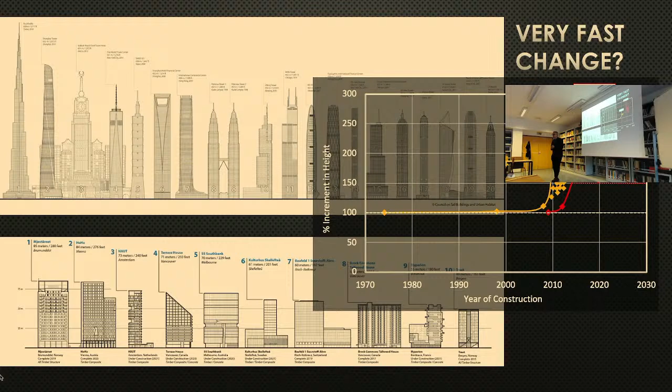But when it changes from being the contents of the building to the structure of the building, what is really the problem?

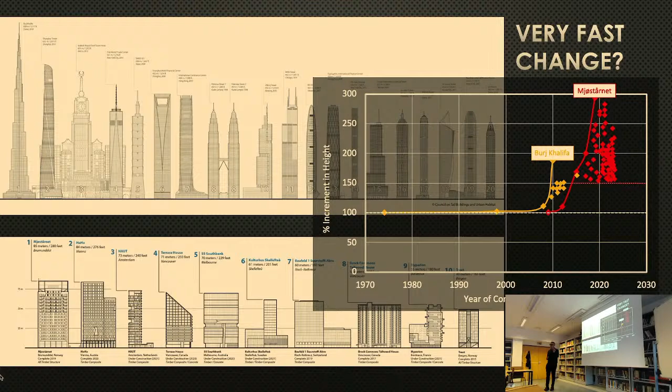Why is it so different to design a structure that is made out of timber, as opposed to designing a building that is filled with timber or cellulosic or char-related contents? The question is not easy to answer because it's not as straightforward. It's a real complicated problem that requires us to go back to what is our definition of a safe structure when it comes to its performance.

When we look at timber, there's been extensive work on structural safety. People have studied robustness, durability, sustainability, but not as much its fire safety. We design buildings, but the question is, are we introducing fire safety appropriately? These are the real questions we need to ask ourselves, and basically, what do we really expect from the performance of a timber structure?

So we have a structure, and a structure has a function, and that function has to deliver something. And that something has to be the same, whether the structure is made out of timber or whether the structure is made out of a non-combustible material. That functionality is what we need to be able to understand. The reality is that all buildings, independent of what material they're made of, have to deliver the same level of safety. We cannot accept to use a structural material that actually performs less than others.

At the end, the level of safety is part of a social agreement, and this is what we expect from all our buildings. You're all sitting here, and I presume you all feel that you are safe, no? Because we have accepted that the way in which this building was designed gave us the right level of safety, and as a result, we walk into these buildings confident that those buildings are actually safe, and therefore no matter what structural material is being used, it has to deliver that.

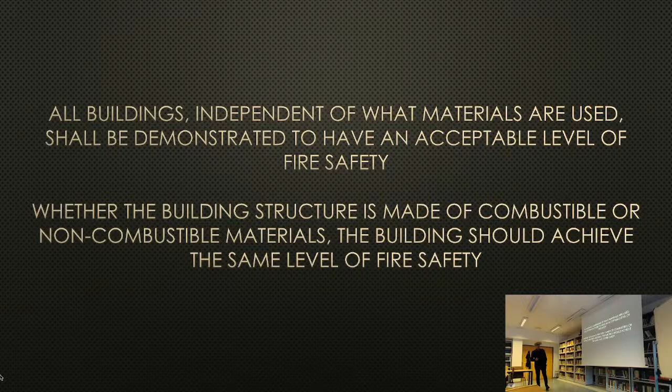So whether a building is made out of combustible or non-combustible materials, the building should achieve the same level of safety. Now interestingly enough, the definition of what a safe structure is when it comes to fire is a very old definition. It was jointly developed between the United States and the United Kingdom, and that definition has permeated around the world for a very long period of time.

In 1928, a gentleman called Ingberg created the concept of fire resistance. That concept established that a structural system has to be able to withstand the burnout of all the combustibles in the building and still perform its function. In other words, a structure can never fail. So in essence, if you burn everything in this room, all the structural components still need to be able to deliver their structural function.

Now, why was this established in such an extreme way? Because they were thinking at the time, in the early 1910s, 1915, about building skyscrapers, very high buildings, where it was very difficult to guarantee that people could evacuate appropriately. So the structure could not fail. And therefore, the way to guarantee that the structure will not fail is by guaranteeing that the building will withstand the burnout of all the fuel that was available within the room.

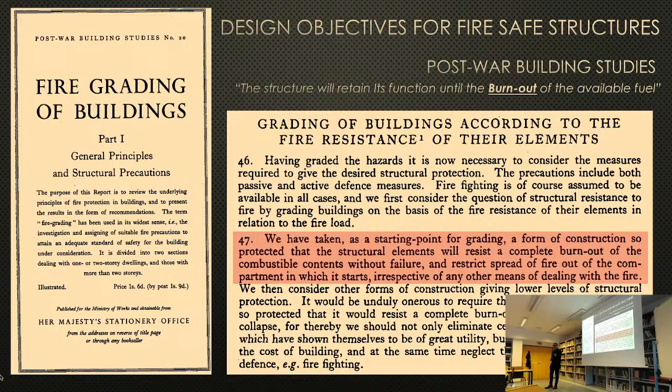Emmons in the United States was trying to destroy Japanese cities, and Thomas in the United Kingdom was doing the same thing for German cities, and so forth. So all this was put in place, and the conclusion was the structure will retain its function until the burnout of all the available fuel. That is the performance criteria. That's what we are designing for today.

So if we look at that concept, here is a typical room. You're going to have combustible linings, which are part of the furnishings of the building. You're going to have furniture. These are all part of the furnishings of the building. You're going to have non-combustible linings, like plaster or concrete. And effectively, what you're doing is designing for burnout, which is a complete consumption of all the combustible linings and furnishings. So everything that is combustible has to burn out, whether it's a lining or a furnishing, and the room will look like this at the end of the fire.

Nevertheless, the structure will remain intact. Now, if the structure is designed of non-combustible materials, and we take, for example, a typical office building, you will find that you have an average of 60 kilograms per meter squared, more or less. Even if you take all these bookshelves and spread them around the room, you will find that you're within an error bar, but around 60 kilograms per meter squared.

So if I'm designing a non-combustible structure made out of steel or concrete, I will take the energy generated by this and apply it, or do a heat transfer calculation to calculate the evolution of temperature of the structure, then look at the evolution of the material properties, do the appropriate structural mechanical modeling, and come up with a way by which I demonstrate that this non-combustible structure doesn't fail. In other words, continues to fulfill its function.

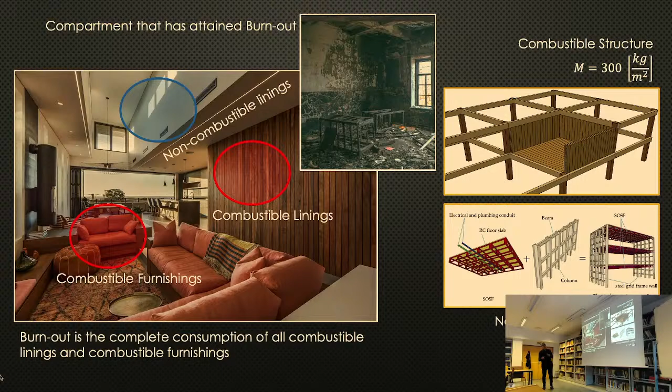It's a problem of demonstrating and understanding how timber actually extinguishes by itself, and being able to create conditions within the building that guarantee that once the heat flux coming from the combustible furnishings stops heating the timber, it will slowly decay and extinguish itself.

Now, this is really, really important because the consequences are astronomical. You can see that, for example, in what's been happening this week in Los Angeles, where you have these massive forest fires, pseudo forest fires, but they're actually now urban fires that are effectively igniting one building after another one after another, propagating across the city, destroying the entire city. We are back to the 19th century with these urban conflagrations now in places like Los Angeles.

Now, the way by which we prevented urban conflagrations is we assume the fire was going to be a 1-story fire. We calculated the radiation, and then we imposed a decay function that allows us to guarantee that adjacent buildings will never ignite. So we turn an urban conflagration problem into a building problem, because if you have a fire in a building, the fire will never propagate to another building. Now, by introducing timber buildings, if we don't guarantee self-extinction, the consequences are going to change dramatically, because now your characteristic length scale is the height of the building.

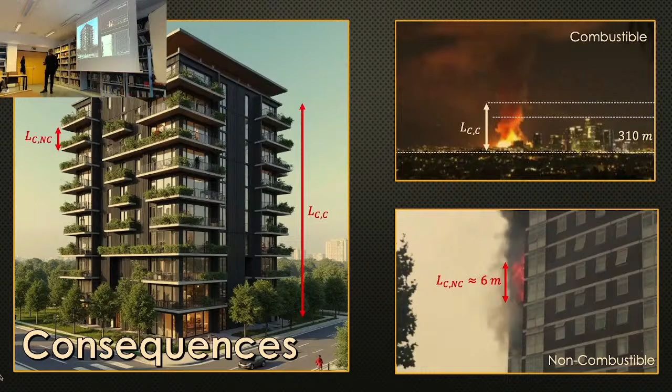So you can see the importance of not changing this small length scale into this massive length scale. The consequences are potentially very severe, and therefore the reliance on self-extinction is really fundamental, and we need to understand the process properly.

Here's a very simple test: you take a piece of timber—this is CLT—and a radiant heater, and you heat up the material. You allow it to ignite and burn. You can see you have a burning rate of approximately 6 to 8 grams per meter squared per second. As soon as you take the heat flux out, the burning rate decreases and eventually disappears. This is the process of self-extinction.

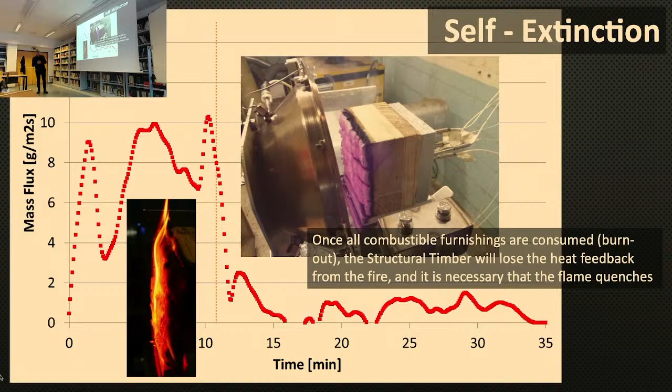This happens because at the interface where the timber converts itself into char, you don't have enough energy reaching it to produce a sufficient amount of gases to maintain the flame temperature above the quenching temperature. So the process is actually quite straightforward, but its understanding is not that simple.

If you look at the problem in more detail, here's a section of the timber: the surface is the char surface, and this is the pyrolysis surface. You have a heat flux going in from the char into the virgin timber, which sustains the pyrolysis of the gases. Then the pyrolysis gases have to penetrate a porous media—the char—and emerge to the outside as a burning rate.

At the charring surface, you have the external heat flux provided by any other heating source, the heat from the flame established on top, and losses to the environment. Those could be radiative or convective depending on the configuration, and the net heat flux results in heat coming into the char.

The energy balance between what is going out and what is going in is the change of energy within the char. If we apply a heat flux, eventually the heat flux going in reaches a steady state. That's the worst case condition, because by the time you reach steady state, the gradient here—the heat conduction to the inside—is going to be minimal.

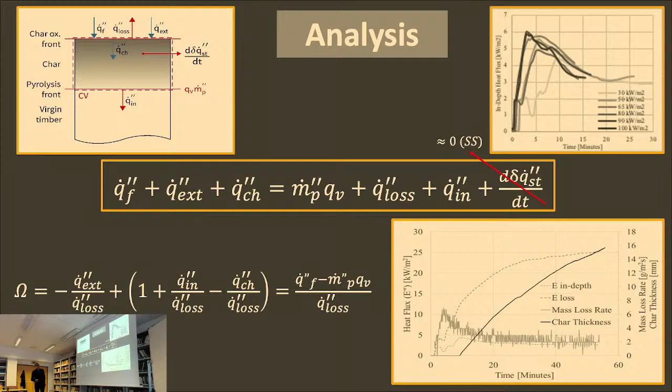If the amount of energy produced is greater than the amount required, then it continues to burn. This is equivalent to a mass transfer number, and it is all done once you have attained steady state conditions.

Now, when you look at this expression, you can go a little bit deeper and do a high activation energy analysis, very similar to what you will do with a counterflow burner, and basically turn all this into a critical Damköhler number. So what is the critical Damköhler number? In this case, there are going to be two: the critical Damköhler number for the gas phase, for the flame, and also a critical Damköhler number for the oxidation reactions at the surface.

This becomes a really important parameter because, in essence, if you have a system where you provide heat, you're pyrolyzing, you maintain a flame, and at the same time you're oxidizing the char so it doesn't grow. When you attain steady state, you have a certain char thickness that, because it's thin, still allows pyrolysis gases to be produced and the flame to continue.

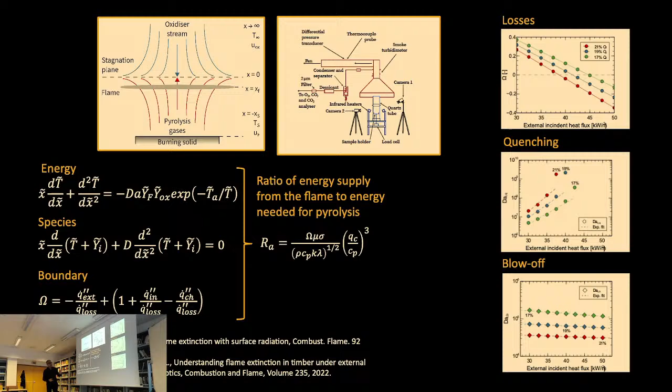Now, if you quench the oxidation reaction, the char continues to grow and inevitably goes to extinction. So what you need to guarantee, what comes out of this analysis, is purely that you have this critical Damköhler number for quenching that is fundamentally related to char oxidation.

When we ran a whole series of experiments, we looked for a critical condition under which you went from the steady state situation, where char was oxidizing and the thickness remained thin, to a point where there's a transition, and that transition is associated with the quenching of the reaction.

Now, how do we identify the quenching of the oxidation reaction? By looking at a ratio of the experimentally calculated Damköhler number to the theoretically calculated critical Damköhler number. You calculate both of them. Technically, the ratio should be 1, unless you made a mistake.

Now, because in our analysis we used oxidation and pyrolysis to calculate the critical Damköhler number for the flame, if the oxidation disappears, then our Damköhler number becomes artificially large. So the moment you go from 1 to this artificially large value, you know that you have quenched the chemistry of the oxidation reaction.

That allowed us to establish a critical condition in terms of the incident heat flux that effectively lets you establish the moment where char oxidation stops. And the moment char oxidation stops, you know that you have the condition that leads to self-extinction. So why is this very useful?

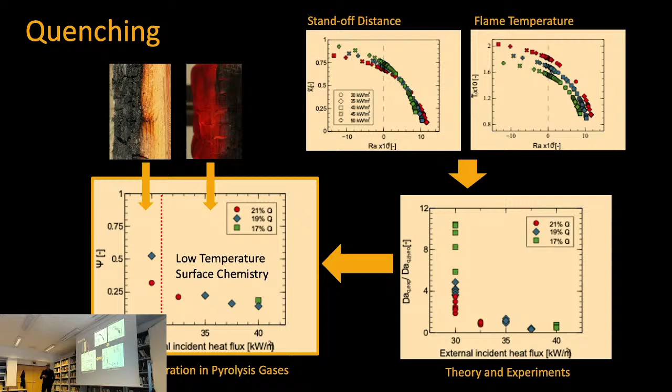And if that compartment is producing more than 30 kilowatts per meter square, the system will continue to burn. If it's producing less, it will eventually lead to self-extinction. So there is a fundamental set of principles that governs self-extinction of timber elements, and the goal is to create these principles and look at them in a practical way.

This is a series of tests conducted at a much larger scale. We were looking at the cases where the flame extinguished versus the cases where you still had a burning rate—in other words, combustion still going on—with obviously a range of transition. You can actually find that the same quenching limit we identified in the analysis more or less holds when you move to macroscopic experiments.

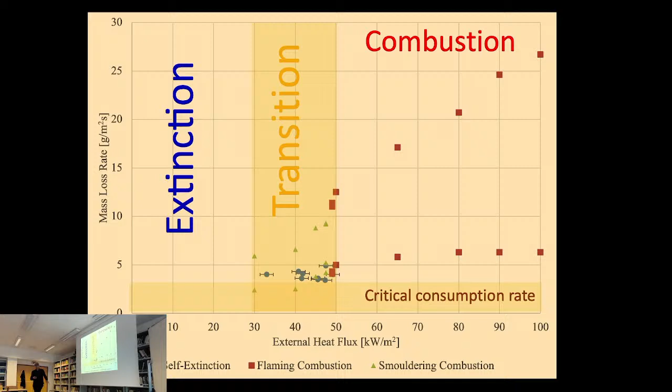Once you go below 30 kilowatts of external heat flux, char oxidation stops, and the problem slowly moves into self-extinction. So at the end, what is the criteria? The criteria is that an external heat flux promotes char oxidation, attaining a steady state char thickness that always keeps the Damköhler number greater than the critical Damköhler number.

As soon as the external heat flux decreases, char oxidation reactions stop, and you get a Damköhler number that is less than the critical Damköhler number, leading to self-extinction. So the heat transfer environment within the compartment defines that external heat flux, and you can convert these critical Damköhler numbers into a critical heat flux for self-extinction, evaluating the problem against that critical value.

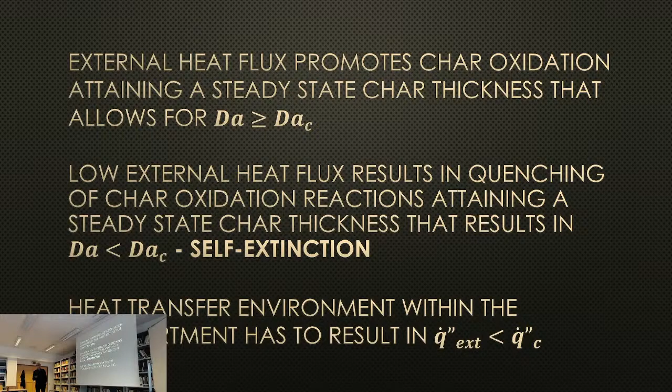Now, the reality is, how do we apply this? Because at the end, we need to demonstrate this. We need to make sure that if we model the fire and model the thermomechanical behavior of the structure until burnout, that basically leads to self-extinction, and that allows me to satisfy the requirement.

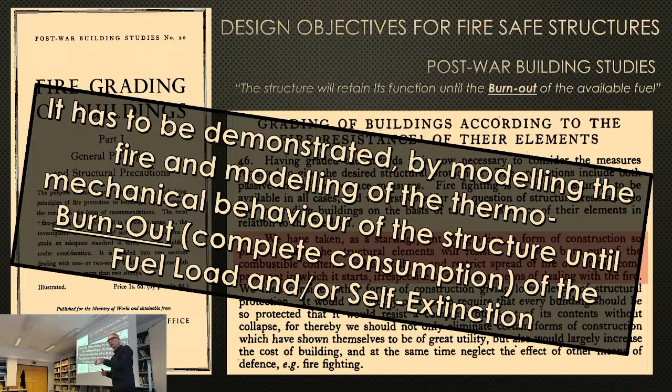You will say, well, straightforward, no? Now that I have the criteria, now that I know what the functional requirement is that I have to meet, I go and model the fire dynamics. So if I have the compartment furnishings burning, they produce a net heat flux that is applied to the structural elements.

I just put a simple one-dimensional version of the heat transfer equation, and I input the temperature evolution in space and time to a structural analysis. Then the structural engineer can do his analysis and determine that the function still retains—the thermomechanical analysis done by the structural engineer will work.

And that has to be done for an imposition of this fire load that imposes the net heat flux from time equals 0 to the time to burnout—in other words, until you consume all the fuel within the compartment. Is that okay? So in essence, the problem, technically speaking, is not complicated.

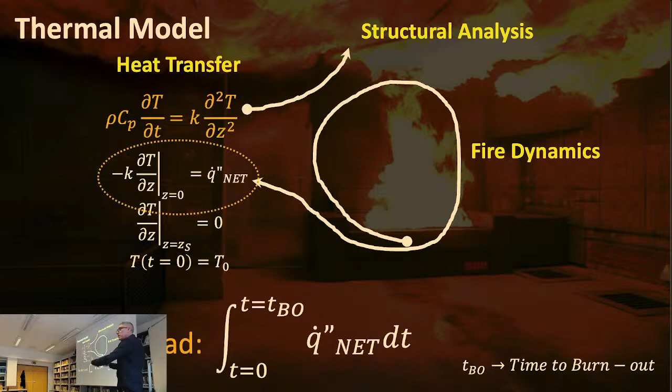And then when it goes to the structure—this photograph in the background dates from the late 19th century, a photograph of a factory in France, where you have steel beams hanging on top of a timber beam. There's a timber beam that has self-extinguished, but nevertheless the heat was enough to completely destroy mechanically the steel. So in this particular case, the timber actually performs better than the steel.

And now, what do we have here? If we look at the thermomechanical behavior of just a simple beam, if we heat the beam, there's going to be bulk heating that results in thermal expansion, but there's also going to be temperature gradients because of the imposed heat flux, and those gradients are going to expand the lower fibre more than the upper fibre, so you're going to get curvature.

As a result, the combination between the bulk heating and the reduction due to curvature—the difference between the two—is what gives you effectively the stresses and strains within the mechanical system. Now, you can normalize that: here's the bulk expansion minus the shrinkage, and you can do a simple geometric analysis to find out what the shrinkage is going to be, then demonstrate by modeling when it's going to buckle, and what kind of deformations you're going to get.

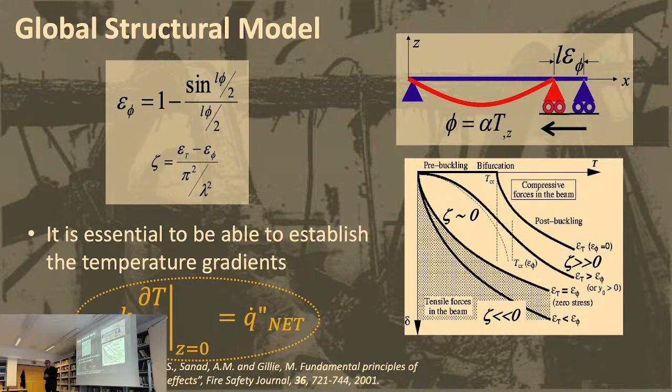So technically speaking, if you have the thermal fields in the solid, you will know what the mechanical properties are, and you will know more or less how to model the structure. So in essence, I can do the fire, then get the temperatures for the structure, then do the structure, get the mechanical behavior, and technically demonstrate the functionality of the system. Now, unfortunately, the problem is much more complicated than that, because these are complicated products.

And when you start looking at these complicated products, you're going to have different forms of mechanical failure. You're going to have, obviously, burning. You're going to have charring, potentially extinction. But you're going to have product-induced thermomechanical behavior.

So, for example, when you start heating this, the material that is being heated, as it loses moisture, is going to contract. And the moment it contracts, the glue lines or adhesive lines become failure modes, and basically you have material that splits. This is called delamination. The splitting of the material results in pieces of timber falling down and feeding the fire, increasing your fuel load and creating a bigger problem.

The mechanical behavior can change dramatically because it's a composite system, and under certain forms of heating, the failure can be on the timber. Under other forms of heating, the failure can be on the glue lines, either horizontally or vertically. So there's all sorts of different forms of behavior that we need to be able to understand, and those problems are, unfortunately, not easy to resolve.

Nevertheless, we are designing tall timber buildings. So how are we doing it?

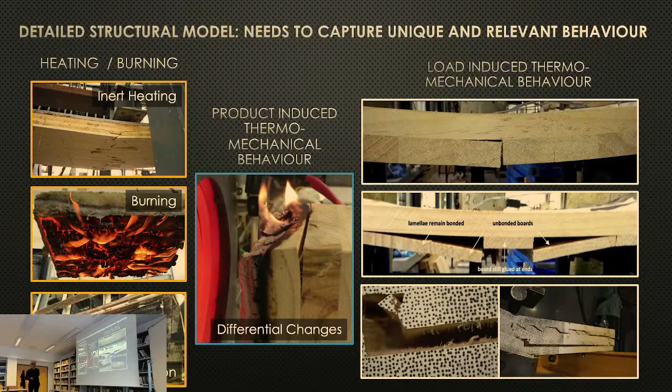So how are we doing it? Because we are putting 40-story timber buildings in cities. There's one going up here in Paris as we speak. And it's really interesting and merits the question. So let me explain how we do it.

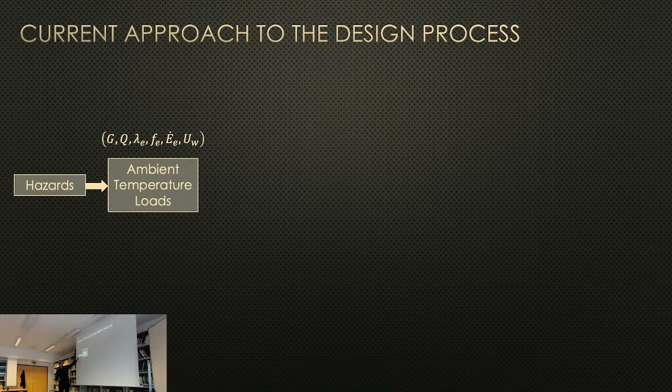So how we do it today is we say, well, we have hazards, and we're going to design the building under ambient temperature loads. So all civil engineers will understand a dead load, a live load, wind load, seismic loads. They put them all in there and they design the building.

With that building, they create a conceptual design. That conceptual design is basically the main system, the main structural elements, the envelope, the bigger parts of the building, and its structural system.

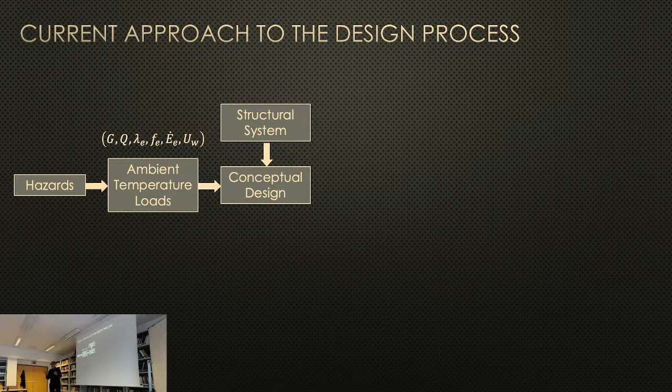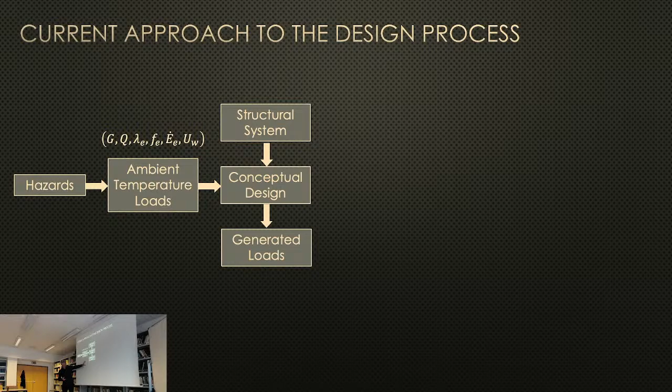Now, structural engineers learned to recognize years ago that there's actually such a thing as fluid mechanics. And fluid mechanics interacts with solid mechanics in a very interesting way. And you create loads as a function of your decisions of what a structural system is.

Now, the perfect example is wind loads. So why do we do wind tunnel studies with structural elements? Because we know that if we change the shape of the building, we change the shape of the fluid mechanics, and we change the pressure distributions in the building. And as a result, we completely transform the loads that reach the foundations. So this is an example, again, of the Burj Khalifa.

This was a study that was done in Canada by Skidmore, Owings and Merrill. They did CFD modeling of the tower, and they also did this wind tunnel study, in which they played with the section of the building to try to minimize pressure loads. So they recognize those interactions, and because they recognize those interactions, they know that loads can be optimized.

So you can actually play with the shapes in such a way that you get the minimum amount of loads created in the problem. So there is a process of optimization that allows me to convert the wind velocity into pressure in an optimal way. So the concept is recognized.

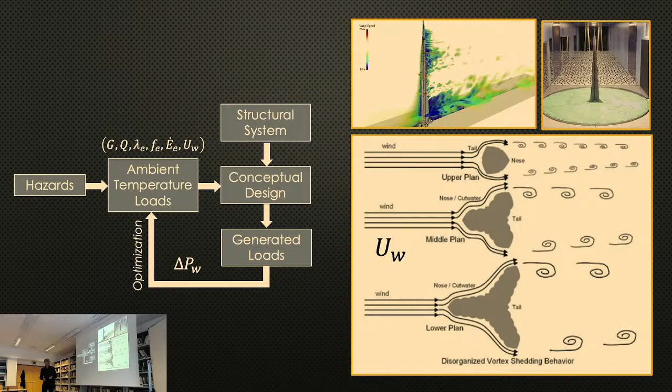Nevertheless, when it comes to fire, it's actually not applied, despite the fact that in the case of fires, temperature is actually quite an obvious one, because if you think about it, if I change the surface to volume ratio of any structural element, I change heat transfer. So in principle, the same thing that I've done with wind, I should be able to do with fire, but we decide to ignore it, and we go straight into section sizing.

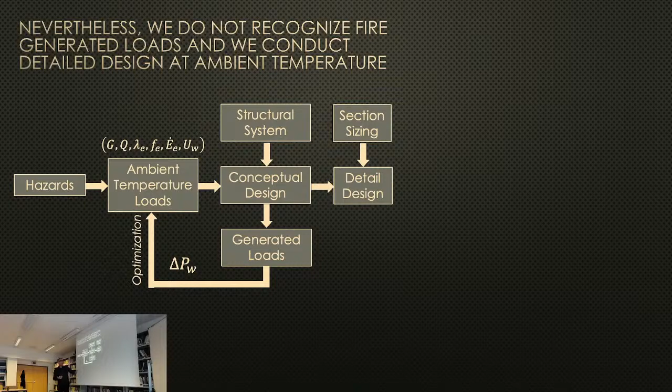So civil engineers will go and define what the size of the beams, the columns, and everything is going to be, all the details, and they get final detailed design, all done assuming ambient temperature.

As I said, the thermal mass and the surface area are going to dominate the heating rate. So if I change the shape of my structural elements, I will completely change the way in which they heat up. So in essence, I should have recognized that and introduced that into the optimization, but I'm going to decide to ignore it.

Now, we lose a very important degree of freedom in the optimization process, because in essence, I could be choosing my sections in a way such that they give me the best behavior for fire. But I don't. I just simply ignore it.

Now, a lot of people do nowadays what we call topology optimization, by which they try to put the mass in the right place so that they get the perfect or optimal structural behavior. Now, that leads to extraordinarily thin elements that have a very small mass and a massive surface area, which are going to fail immediately in the event of a fire. So for people like me, topology optimization is topology de-optimization, because we're creating elements that are going to be fusible, that are going to be failing immediately.

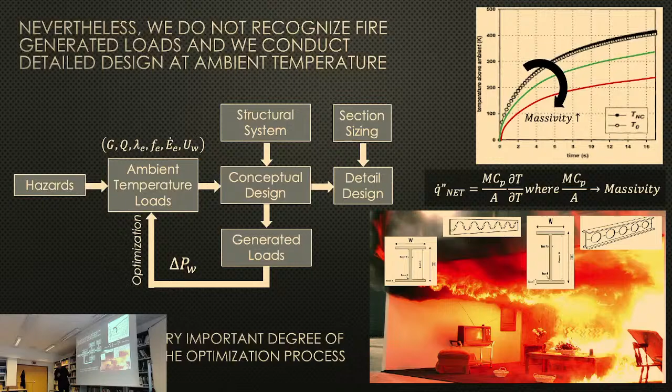So, but anyway, that's the way we do it. Now, so how do we currently capture the fire load? Very simple. As I say, the amount of fuel has been statistically determined. People have been doing surveys, mostly insurance companies, and they've come up with an amount of fuel that is the fuel load, FLD.

So if you divide the fuel load by the burning rate, you get the time to burnout, which is what we want. Now, the time to burnout is therefore a function of the fuel load. But this function is highly nonlinear.

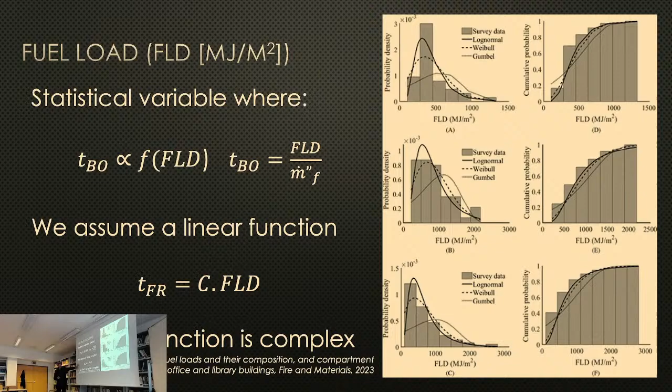But what we do is just say, well, let's forget about the fact that it's nonlinear. Let's make it a linear function, without recognizing that if you look at all the different properties of a material, just taking geometry as a characteristic value, the burning rate increases dramatically as you play with what's called the ventilation factor. The top part is the flow rate of air into a system. The bottom part is the total surface area that loses heat. So this is heat generation versus heat losses.

And as a function of this ratio, the burning rate is going to change dramatically. If you have a very high ventilation rate, a lot of energy gets produced and you get very high burning rates. If you have a very low ventilation rate, little energy gets produced and you have low burning rates. All this is ignored, and we basically assume it's a constant value somewhere in the middle, which is 0.8, and then we just go with that.

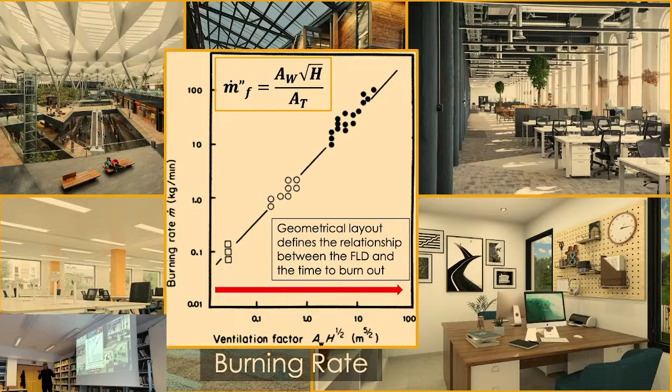So we've passed that impasse. Now we have a burning rate. But how do we get that burning rate? Then we actually do a furnace test. Now, what is a furnace test?

We're going to put our structural element inside a furnace where we control the temperature of the furnace, which is a really interesting question, no? Because we all know that temperature is not the same as heat flux. Nevertheless, the way we run the test is as a function of temperature.

What we are controlling is the temperature, and we're calculating the burning rate by fixing the temperature to a standard temperature-time curve. This standard is ISO 834. Every country has its own number, and effectively it is just basically what we call a standard temperature against which we will subject all structural elements.

Now, if we look at different thermal conductivities for different materials, you will find that if what I am controlling is the temperature, the heat flux is going to change with the thermal conductivity of the material. Furthermore, if the material ignites, the heat flux is going to be negative.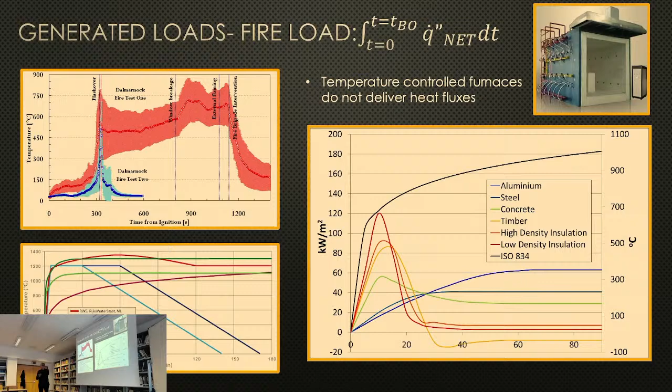So the entire premise by which we determine those burning rates—and people have said, well, maybe this curve is not enough, let's do a different one—but they're all temperature-based. And at no point are we determining heat fluxes. All that we're doing is basically creating some sort of surrogate number for the burning rate, as a function of a test that was defined in 1928, where effectively temperature and heat fluxes were not necessarily considered to be that different.

So in essence, we have created a test that is just a surrogate. And that surrogate has no bearing on reality, because it is based on temperatures and not on the control of the heat flux, which is the parameter you should actually be interested in.

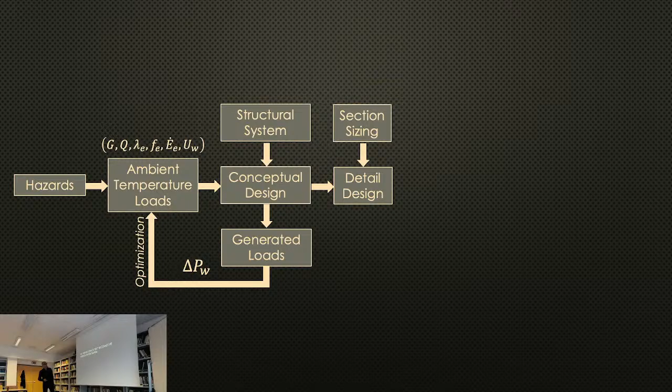So once we've done that, then how do we address our design? Well, what we say is there are two ways in which the timber is going to change. One, it's going to lose section. Two, it's going to increase in temperature. And that increase in temperature is going to make the timber weaker.

We can see the mechanical properties drop almost to zero by the time you get to 300 degrees. So it's going to make the timber weaker, so I have to increase the cross section. I add a corrective, sacrificial increase to the cross section. Now it's also going to lose section because of charring, so I create a charring rate based on the furnace test, and basically add a sacrificial layer — another correction.

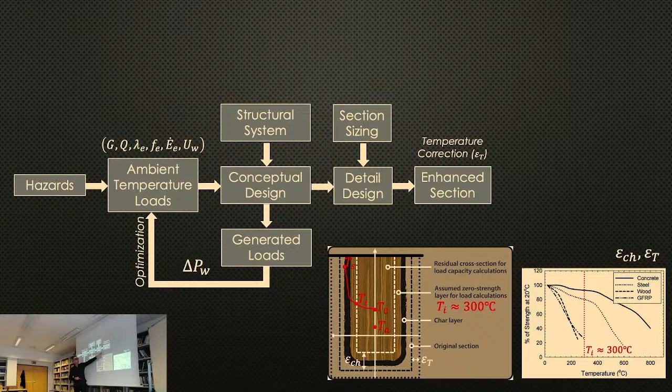So what I'm going to be doing is just designing everything in cold conditions, and then adding the charring correction and adding the thermal correction. Those two corrections are considered enough to establish that the system is going to work. So in essence, I'm simply going to enhance the section with epsilon T, and then enhance the section with epsilon char, to correct for charring rates and for temperature increase in depth.

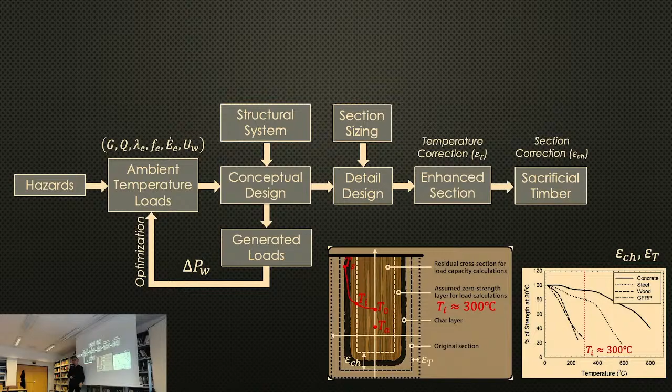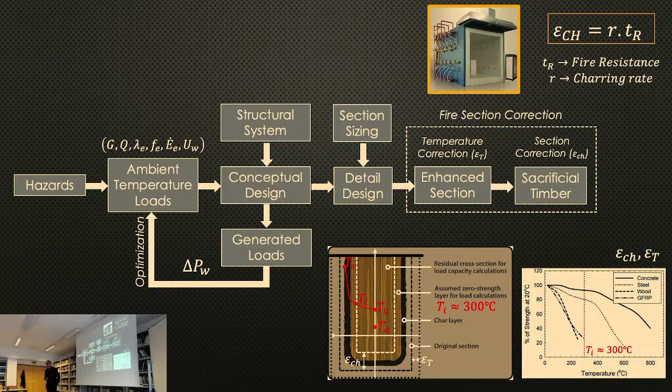So as a function of that, where do I get the charring rates? I get them from the furnace, despite the fact that we know it's not appropriate. And where do we get the temperature in depth to calculate this? We get it from the furnace. So as a result, we get a fire section correction, and that's how we design timber buildings today.

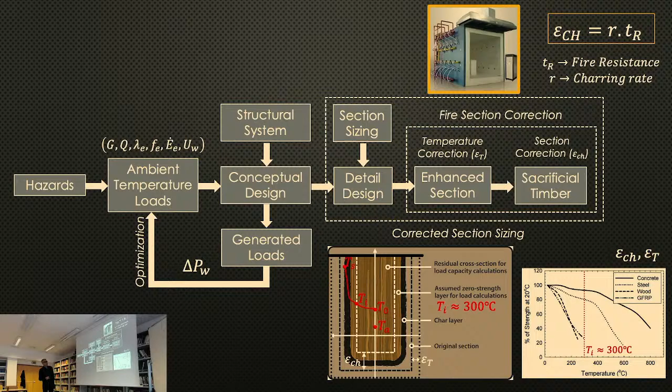So once you get the correction, now you have a correction sizing, then you have to go and ignore the fact that this is a composite, where part of it is timber, but those timber elements are glued with adhesive. And the temperature of the adhesive and the way its mechanical properties drop by 90 degrees, the adhesive has no mechanical properties. They're very different to the loss of mechanical properties for the timber. Nevertheless, I ignore that. I don't pay any attention to it.

Another problem is moisture migration, because water is going to migrate through the porous media, and we know that it's going to accumulate and you're going to have very high moisture levels. The problem is that the decrease in mechanical properties with moisture is extraordinarily fast. As soon as you start increasing the moisture content, your mechanical properties go down to zero. As a result, you get concentrations of stresses and the material cracking. The material splits because there's no mechanical strength here and there's more mechanical strength here, and therefore at the shear layer, between the two, you're going to find your cracks.

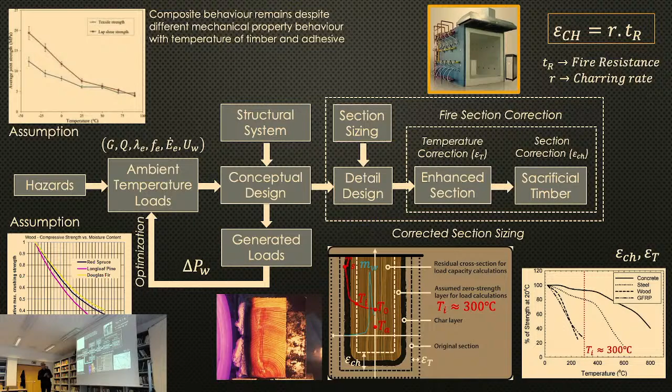So none of these things are incorporated. They're all somehow ignored.

Now, once we ignore all that, then we go and design the connections. But we also decide to ignore that the connections are going to behave weird because they're going to be expanding and rotating, and those need to be designed in an appropriate way. We know that the heating and cooling processes are going to be very different, and the connection is going to lose strength. All I'm going to do is just put a safety factor. And now I have a safety factor that I'm going to use to optimize.

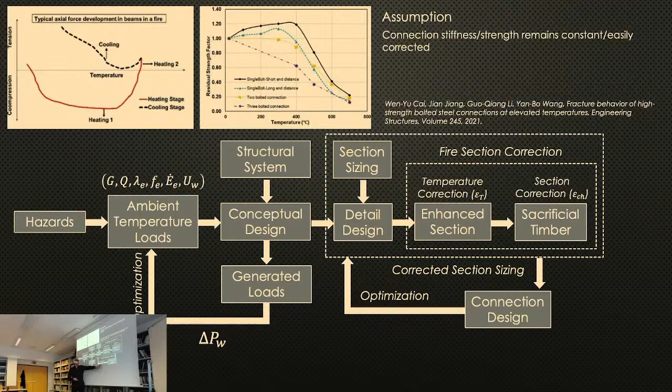So basically, I design the connection in cold. Everything is done in cold. I design the connection and put the right connection so I get the smallest sections and do an optimization process. And that brings me to my performance assessment, which allows me to make decisions whether I reject the design or whether I accept the design. That's how we design buildings today.

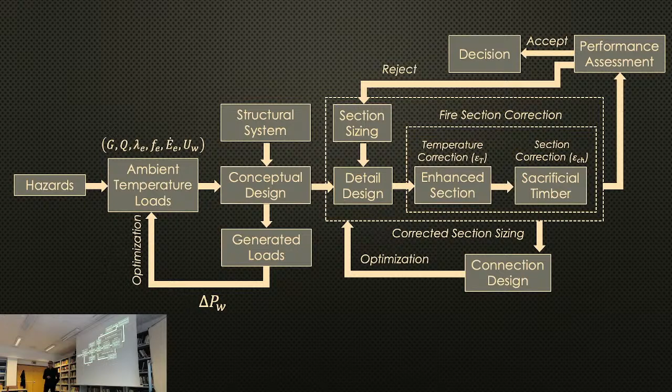So the fire resistance test remains the surrogate for the fire, and we ignore everything, and therefore just basically follow that surrogate as being the approach.

Now, if you go through the pages of the Eurocodes, the Eurocode for timber design was issued about 8 months ago. It has been a process of revision for about 6 years. And they've basically redone this all over again. There's almost no changes on the previous one. All that there is more correction factors, more safety factors.

So now, you used to have section multiplied by chi 1, chi 2, chi 3, chi 4. Now it's chi 1, chi 2, 3, 4, 5, 6, 7, 8, 9, 10. But in essence, none of these features are incorporated into the process at all.

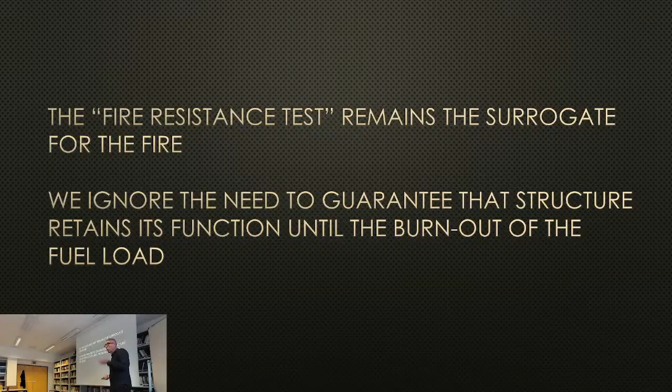It protects heat transfer into the solid, so none of this other shrinkage and deformations and splitting and moisture happens. If you wait until this happens, everything comes your way. So in essence, going back to extinction, what you need to do is basically guarantee self-extinction as soon as possible. Now, you're going to say, well, you cannot control how much fuel you have in a compartment.

No, you can't, but you can control the geometry. So if I make a compartment taller, or I change the ratio of the windows and doors and things of the sort, I can actually change the thermal environment. And I can make sure that critical heat flux decrease happens very fast. As a result, I get a very, very thin char layer that gets formed before self-extinction occurs. And then the process becomes one that enables you to circumvent everything.

So how do you do that? Here's a series of tests that we conducted. You can see that the fire starts, it grows, it reaches a peak. You have a very, very violent fire happening, and then all by itself, very rapidly, it dies out, and then you get self-extinction. Now, if you play with the different conditions, you find how the QNet starts evolving, and you can find conditions by which your time to burnout is 15 minutes, in which case you get a very thin char layer, and you circumvent all the complexities of the problem.

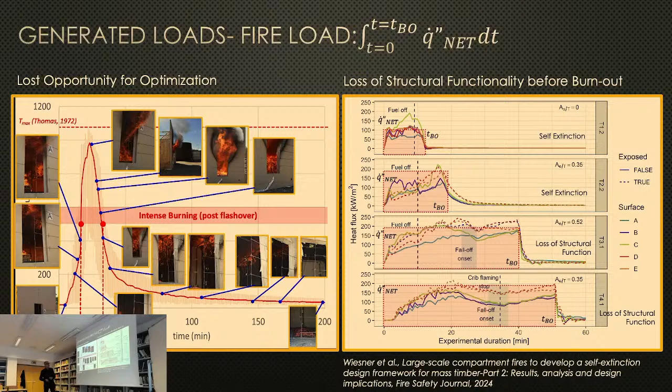Now, can you play with all this? Yes, you can by actually playing with the geometry of the compartments. This brings another challenge, which is that you need to inform architects so that they can understand, when designing the volumes and spaces, that they have to design them so that the fire actually works correctly. So at the end, if you do that, you can change the process and introduce the fuel as one of your loads.

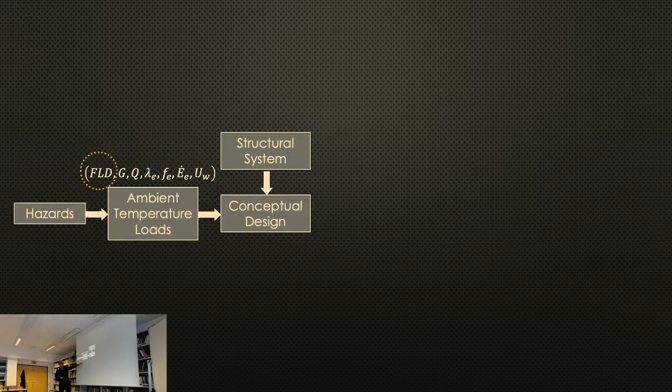Then you can do your conceptual design and generate those loads. And now you can introduce not only things like wind, but also fire as part of your initial optimization process that defines the general or conceptual structural design.

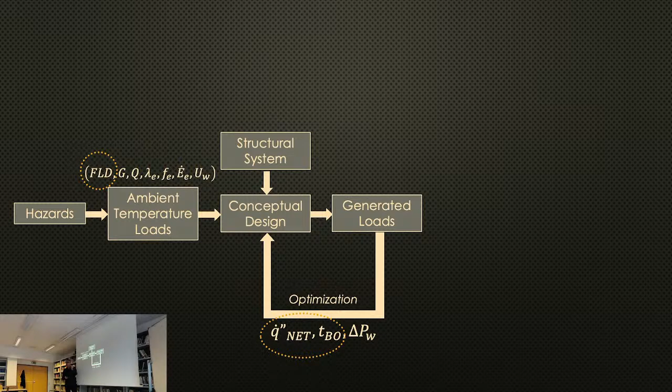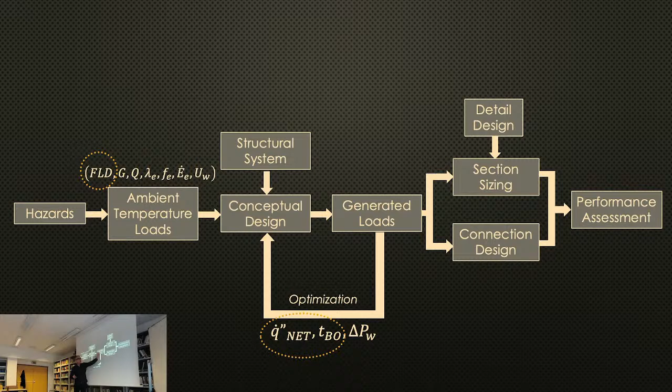So at this point, you're talking to the structural engineer and the architect, and they are designing things in a way that already introduces this and guarantees self-extinction where my char layer is this thick. Is that okay? Once you do that, you can size your sections, connection detailing, and then do your performance assessment. And the process becomes infinitely simpler because you've circumvented all the complexity. So you can make your decisions and have a building that works.

So given what I just said, do you think that we're ready for this?

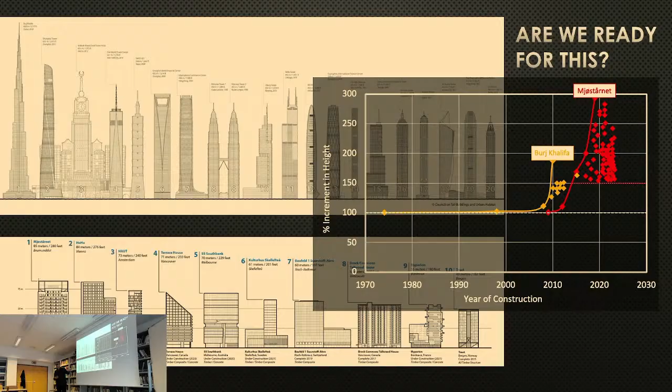It's a really, really big question, because the bottom line is that this is a matter of lack of competency. We have a construction industry moving at a very fast speed, driven by sustainability drivers pushing it in a direction where the actual participants in the design process are not competent enough, because they don't understand anything I just explained. Now, the tools we give them, the Eurocodes and so forth, do not incorporate these things either. So in essence, we're moving into a space in which the process of design we are implementing is not directed towards resolving what really matters, which in this case is the self-extinction of the timber. Thank you very much for the attention.

Happy to answer any questions.

Thanks for the talk, Jose. I'm back to the rate of charring. Yeah.

So I have a question. You say the faster the rate is, the best way it is to protect the material, or is that what you are saying, or not?

I mean, basically, the best way to protect the material is to attain the critical Damköhler number as fast as possible. As fast as possible. Yeah.

Why? Because the 'as fast as possible' depends on how the rest of the room is burning. So if I have a room with this furniture, this ceiling height, those windows and doors, this is going to produce a lot of heat for a very long period of time. So you will not attain self-extinction until much later. So you will have a lot happening with your structural element. The char would have progressed quite deep. It would have probably started affecting the glue lines. It would have created contractions, all sorts of different things.